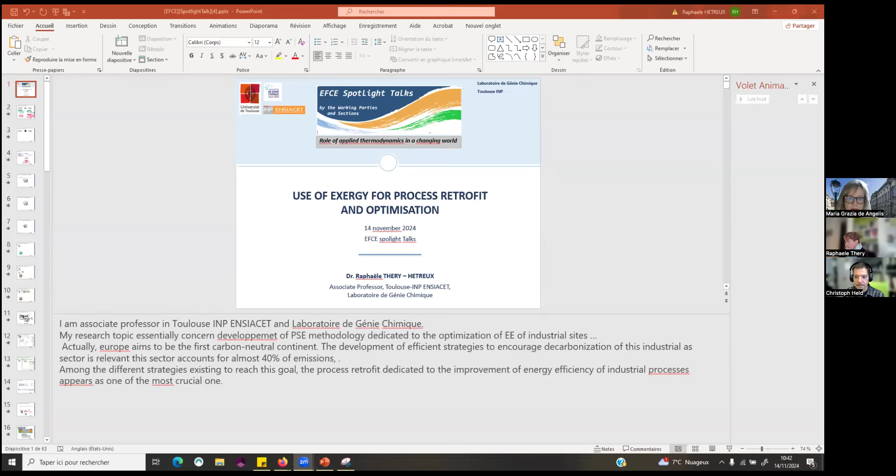That's the good one. Yes, a bit. Yes. Is it okay? Perfect. Screen? Yes, perfect. Thank you very much.

So thank you very much for your introduction. I am an associate professor in Toulouse INP-ENSIACET and in the Laboratoire de Génie Chimique in Toulouse. My research topic essentially concerns development of PSE, process system engineering methodology dedicated to the optimization of energy efficiency of industrial sites.

Europe aims to be the first carbon neutral continent, and the development of efficient strategies to encourage decarbonization of the industrial sector is relevant because this sector accounts for almost 40% of emissions. Among the different strategies existing to reach this goal, process retrofit, dedicated to the improvement of energy efficiency of industrial processes, appears as one of the most crucial ones.

In chemical engineering, pinch analysis and exergy analysis are key methods for improving industrial energy efficiency. Pinch analysis focuses on maximizing thermal energy recovery within processes, often leading to the development of efficient heat exchanger networks. The problem is that it only considers thermal energy.

Exergy analysis, on the other hand, includes thermal, mechanical, and chemical exergy energy components. It allows us to assess inefficiencies from irreversibilities, but also from environmental losses. However, exergy analysis is complex. It lacks systematic methodologies and computer tools dedicated to the proposal of practical retrofit solutions, and it still heavily relies on engineers' expertise.

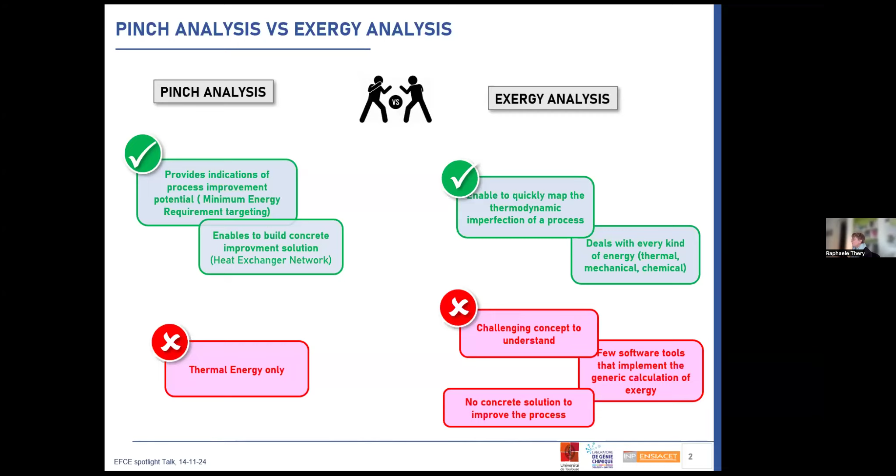So in the end, it appears that these two approaches are highly complementary and would benefit from being combined. Relying on this idea, the COOERE approach was developed through a research project funded by the French National Research Agency and involved partners such as Veolia and Prosim company and the Laboratoire de Génie Chimique and AgroParisTech.

The project goal was to create a new method that combines optimization, pinch analysis and exergy analysis to retrofit industrial processes for improved energy efficiency. The methodology was then implemented in the ProSimplus simulation software.

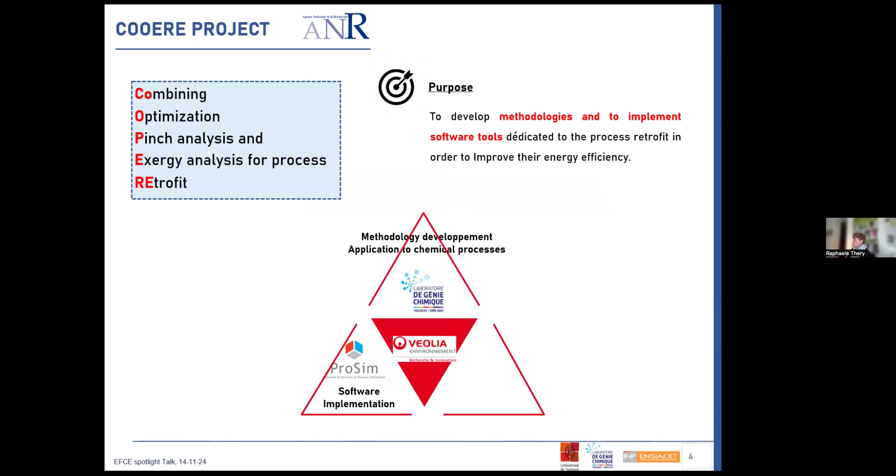Douglas suggests that you can think of a process like an onion with layers. When you're designing a new process, you work through these layers, starting from the core and moving outward. But if you're analyzing an existing process, it's usually the opposite. You start from the outer layer, like utilities and heat exchanger network, and try to keep the core intact as much as possible, only digging deeper if you really want to.

This idea is what the COOERE approach intends to implement. First of all, the COOERE approach begins with data collection, statistical analysis, and process modeling. Reliable and accurate data for the operational process are essential for effective modeling.

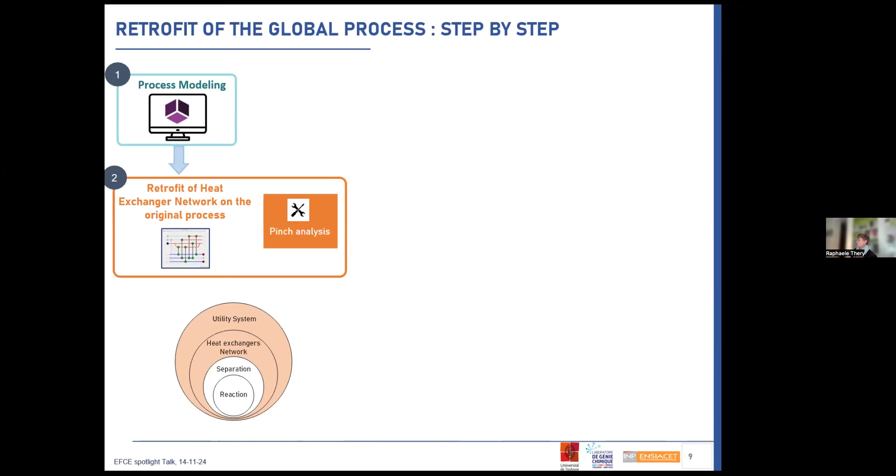The second stage will focus only on the two outer layers of the onion. The approach is essentially based on pinch analysis for the retrofit of heat exchanger network and utility system. I will not go into detail of this aspect as it's not the fundamental subject of our presentation.

If the engineer feels that the savings from the first steps aren't enough, then there's a third stage to go deeper in the process. In this stage, pinch analysis is combined with exergy analysis to get more insights. I will explain how the combination between pinch and exergy will work and show some examples later in the presentation.

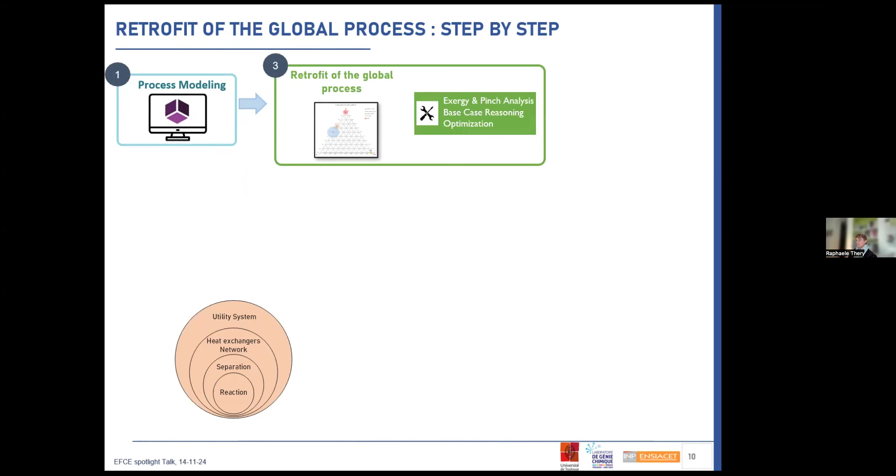Let's take an example, an academic example of an ammonia production process to illustrate the methodology. A functional analysis of this process has permitted us to identify several functional areas. These areas are modeled and mixed together in the ProSimplus software.

As we will see later, the exhaustive modeling of the process plus utilities is really necessary to perform a relevant exergy analysis. Given this model, the first step aims at performing an exergy diagnosis and then formulating some improvement suggestions based upon this analysis.

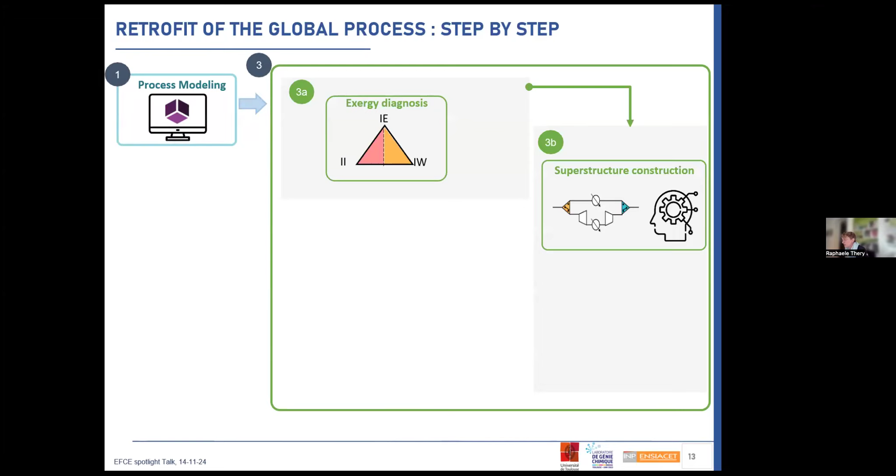So let's go to the exergy concept. Exergy originates from the early 19th century with the Carnot engine and the concept of energy quality. The term, derived from Greek, ex meaning external and ergos meaning work, was first used in the mid-20th century and is also known as available energy.

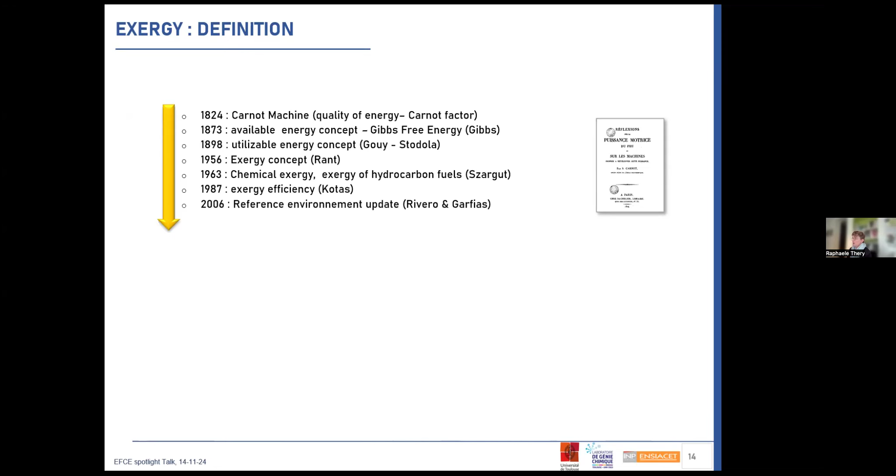Exergy represents the maximum useful work a system can produce as it reaches equilibrium with its environment through reversible processes. So it's quite complex, but we are used to saying that while enthalpy measures energy quantity, exergy will indicate some information concerning energy quality.

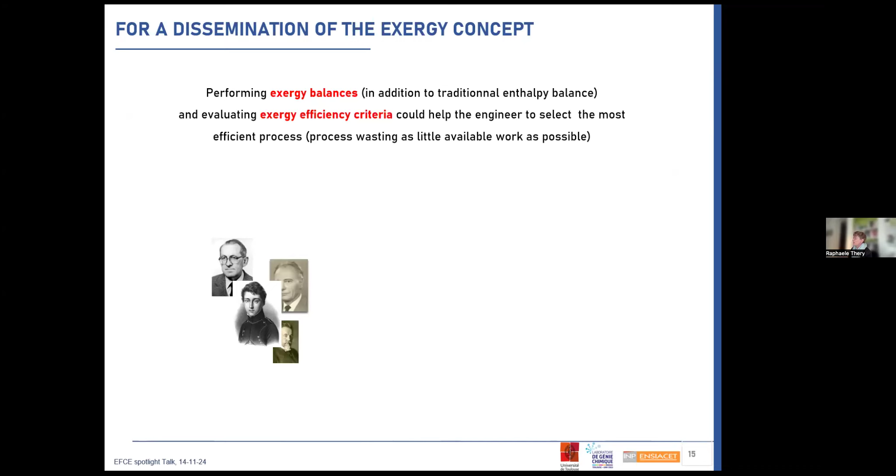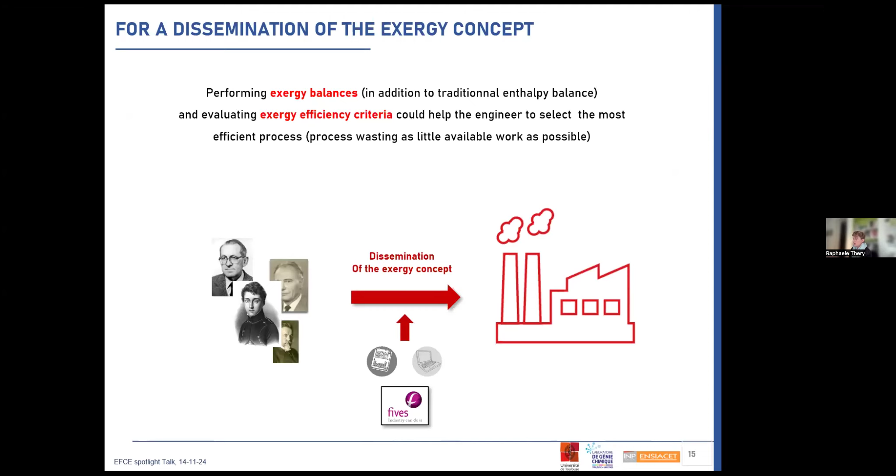Using exergy balances helps engineers choose processes that minimize wasted or destroyed available work. First, exergy was mostly seen as a complex concept suited for thermodynamic experts. Our role was to make it easier to use in order to disseminate this concept in the engineer world. So we decided to integrate it into a simulation software like ProSimplus, making it possible for engineers to perform exergy balances just as easily as for traditional enthalpy balances.

In non-ideal processes, exergy can be either wasted, meaning it is released to the environment without being recovered, such as waste heat, for example. It can also be destroyed, due to irreversibilities in the real processes.

These irreversibilities arise from factors like non-isothermal mixing, non-isobaric mixers, thermal losses, pressure drops in the unit operation. And we must also say that some irreversibilities, such as heat transfer with non-null temperature difference in heat exchangers, and chemical conversion in chemical reactors, are unavoidable because they are essential to make the process economically viable.

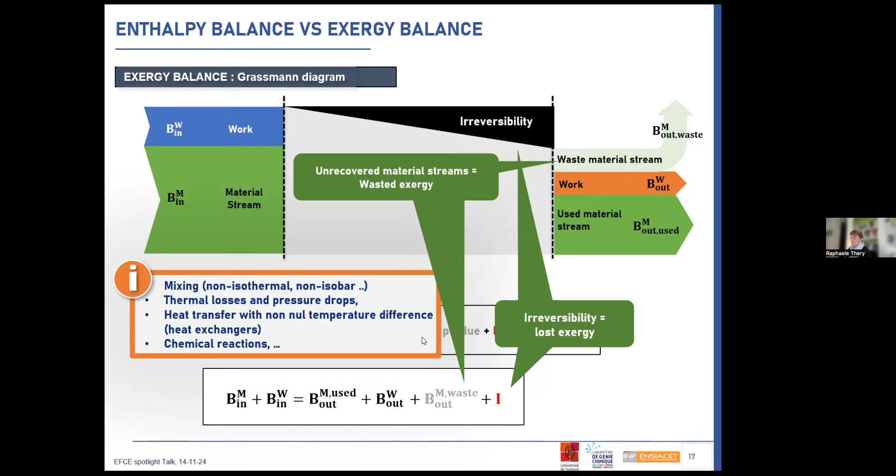In this equation, we can find the different terms. The first term is BW, which is the exergy of mechanical work. The mechanical exergy is one of the most qualitative forms of energy. So here BW is equal to W.

Excluding the irreversibility terms, which is deduced from the other ones, we can also find the exergy of material streams here. We make the difference between the used material stream and the waste material stream, which is unrecovered.

Assuming that kinetic and potential contribution to exergy remain constant in chemical processes, the remaining contributions that must be evaluated in the simulators are physical and chemical ones.

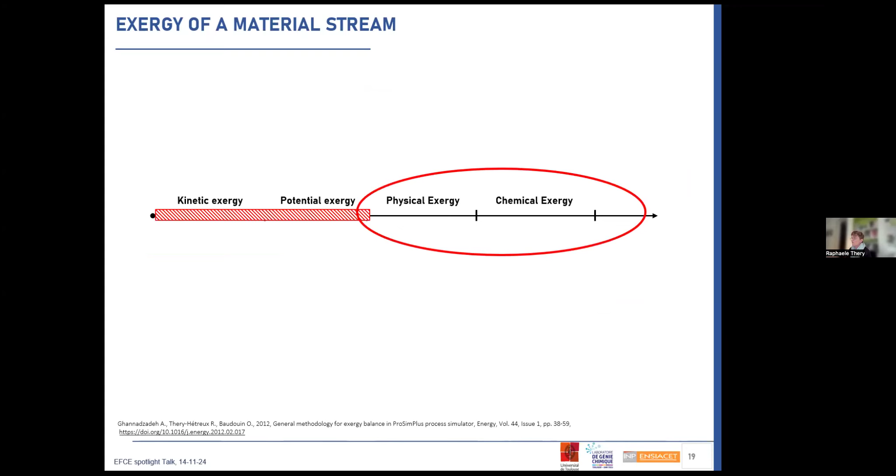So to evaluate this term, a general formulation for the exergy had to be implemented in ProSimplus. The formulation to be implemented in a generic software must be applicable across different thermodynamic models and also valid for liquid vapor streams.

As you can see on this diagram, exergy can be composed of 3 different contributions. The first one is the thermal contribution of exergy, which is the minimal work for the streams to go from the process temperature to the environmental temperature.

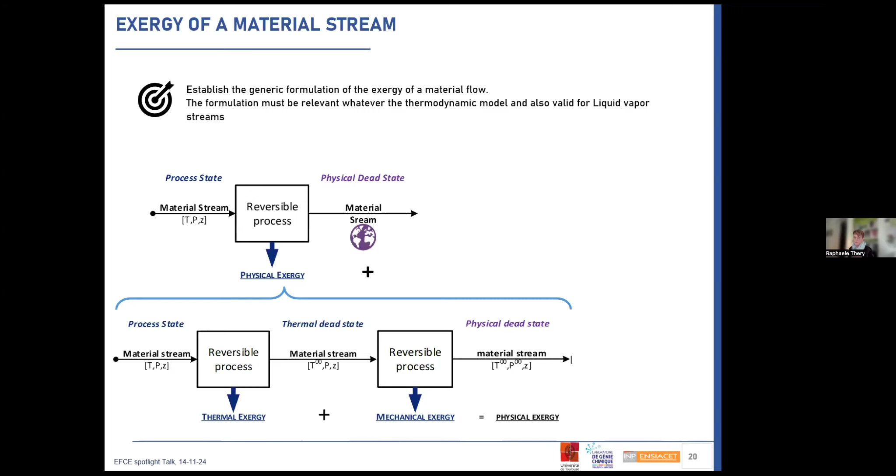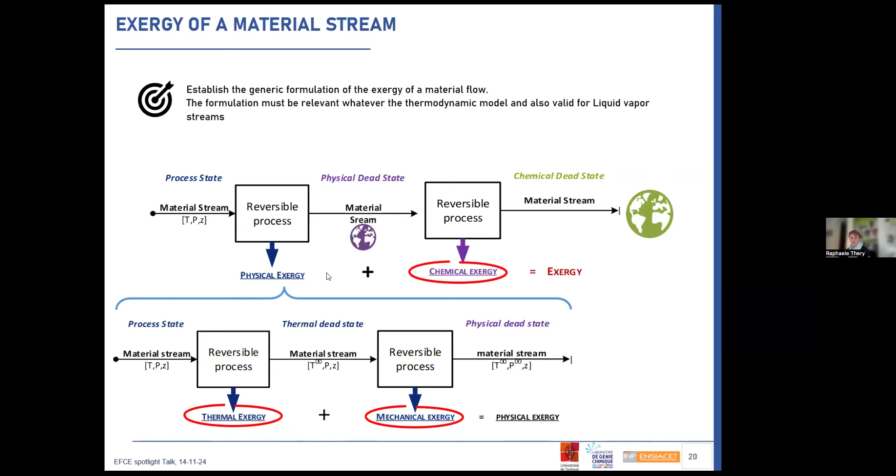The mechanical exergy, which is just the minimal work required to go from the process pressure to the environmental pressure. And finally, the chemical exergy, which is related to the minimal work required to go from the process composition to an equilibrium mixture made up of environmental components. This is the so-called chemical dead state. So this calculation has been implemented.

As you can see on this diagram, no heat stream appears. Why? Because these hot and cold utility streams must be represented as material flows in the modeling simulation. As a consequence, a relevant exergy optimization of the process under study necessarily requires building a complete model, including the core process, but also the utilities.

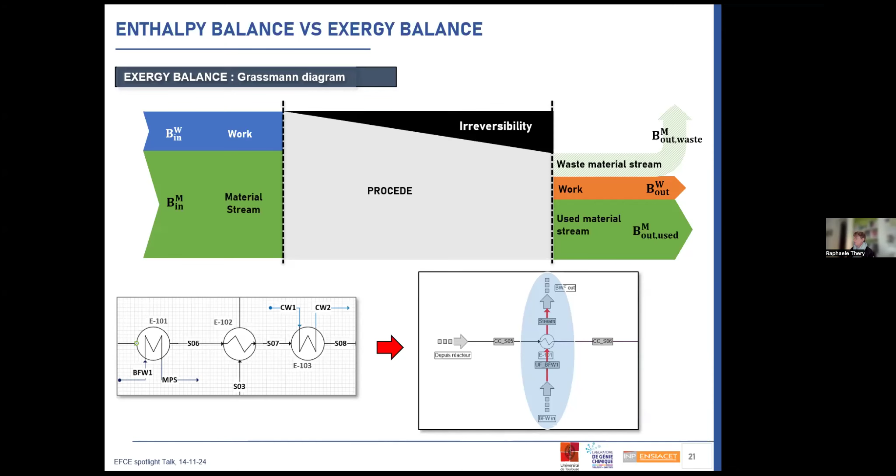So, what's the goal of exergy balances? Basically, it helps us pinpoint which part of the process should be improved in priority. To get a meaningful exergy map for the process, it is useful to look at KPIs such as exergy efficiency.

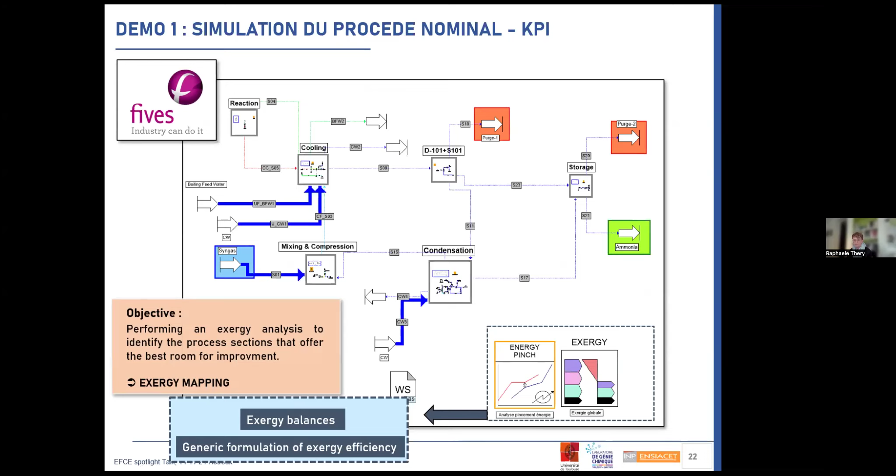Within the exergy module implemented in ProSimplus, we can set up an exergy balance and establish a very efficient formulation of exergy efficiency. So let me explain this formulation.

In any unit operation or process zone, a large part of exergy passes through the system without being modified. For example, in a heat exchanger, the heat exchanger will only affect the thermal part of the exergy. The chemical and mechanical part of exergy will not be modified. So in a heat exchanger, the transiting exergy will be composed of the mechanical and chemical contributions.

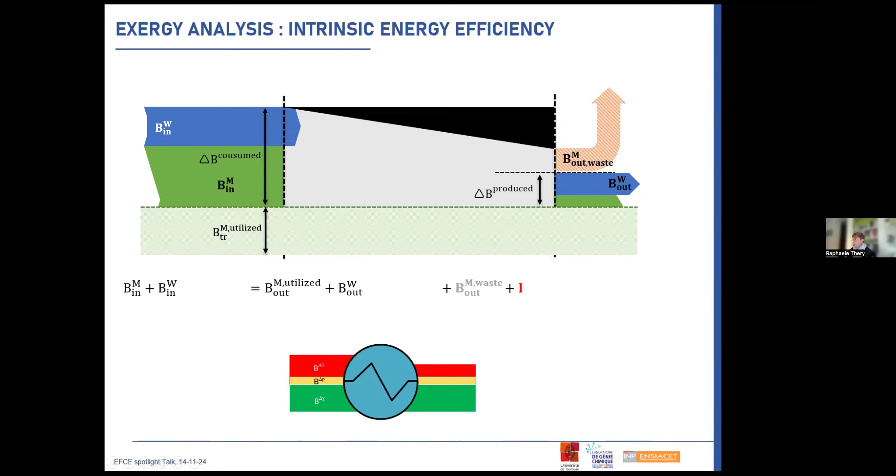By adjusting the exergy balances, deducing the transiting exergy on both sides of the equation, we can define 2 key concepts: the consumed exergy and the produced exergy. This approach helps us create a much more efficient formulation of exergy efficiency, which will be implemented in the ProSimplus simulation.

Unlike other formulations, such as rational efficiencies, intrinsic efficiency works really well for systematic evaluation in a simulator.

Another interesting point is that when we divide each part of the exergy balance by the consumed exergy, we can connect the three KPI coefficients that help us analyze the system. We can show that the sum of intrinsic efficiency, intrinsic losses, and intrinsic irreversibilities adds up to 1, so that we can use a ternary diagram to plot each area in the process visually.

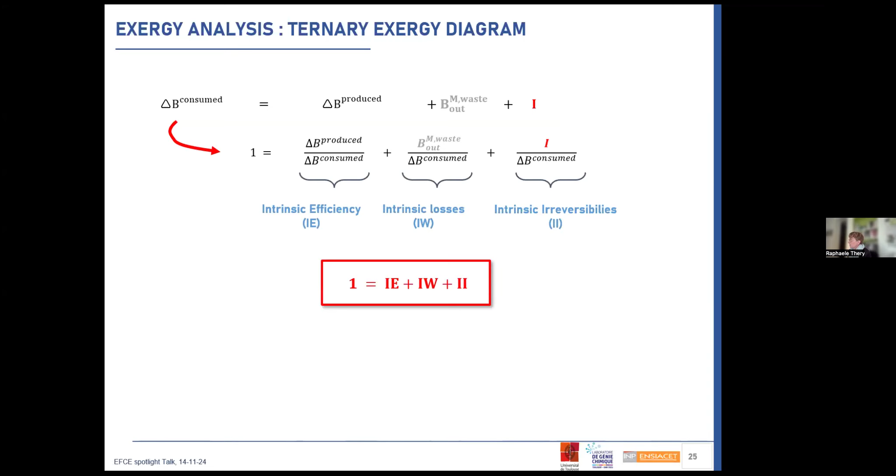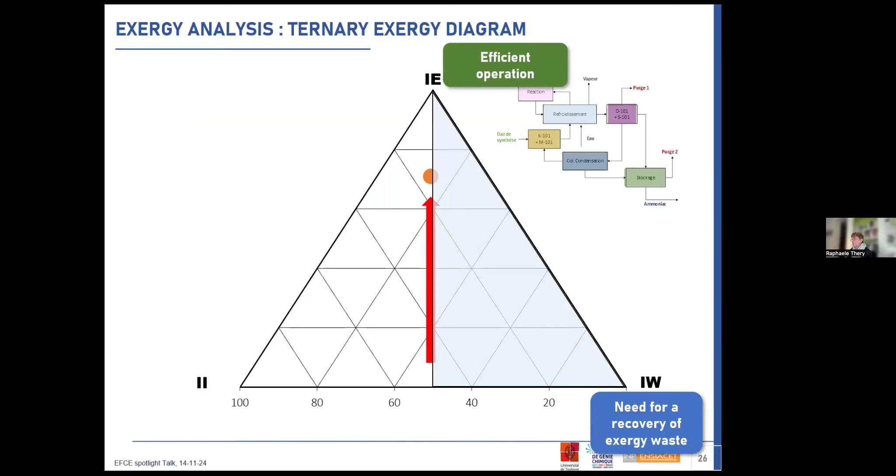The more the point is at the top of this diagram, the more efficient the zone is. An inefficient point located on the right side of the diagram indicates a need for better recovery of exergy waste, whereas a point located on the left side indicates a section that suffers from irreversibilities. Finally, the size of the point is proportional to the amount of destroyed or wasted exergy.

So coming back to our illustrative example, you can find all the points concerning the different sections of the process here, with different colors for each section. For example, it seems obvious that the mixing and compression section needs to be improved toward reduction of irreversibilities, whereas the separation and purge section will be improved in terms of recovery of external wastes.

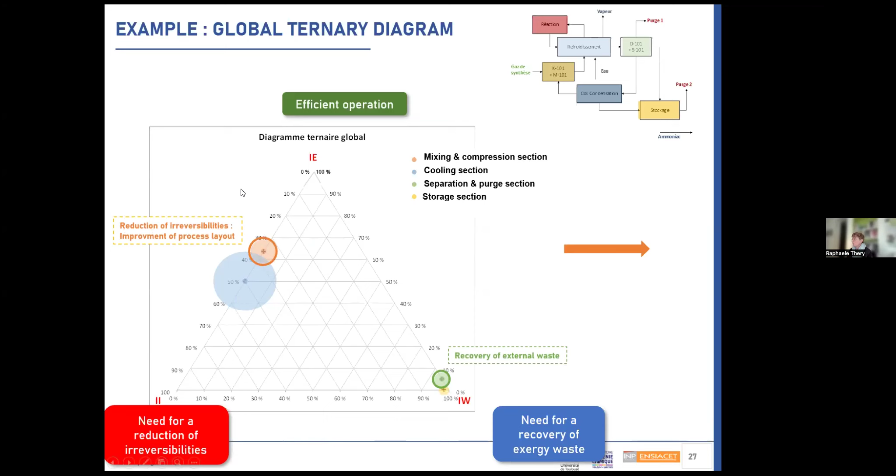So let's begin studying the mixing and compression section. This diagram illustrates the intrinsic irreversibility and the relative irreversibility of each unit operation of the section. As you can see, the mixer contributes to more than half of the irreversibility of the section, and the total intrinsic irreversibility is almost equal to 100%.

So this irreversibility is mainly due to the non-isothermal mixing in the mixer. The remaining irreversibility here is due to a high pressure drop in the compressor.

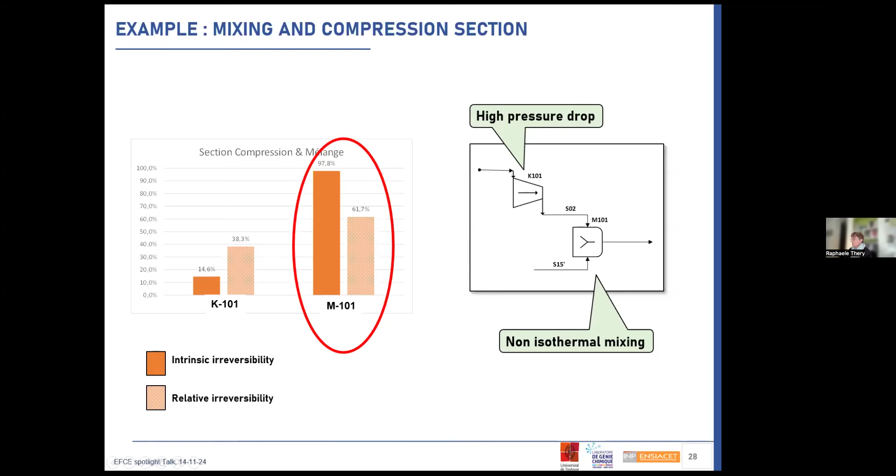Let's look at a few changes that we could introduce in the structure to reduce the irreversibilities. First off, we could imagine adding a heat exchanger to each inlet of the mixer. This would help achieve isothermal mixing and reduce exergy losses there. For the compression section, we could imagine adding an extra stage of compression with a heat exchanger between the two stages.

One thing we must keep in mind is that at this stage of the method, we do not include any heat integration, and we model only the hot and cold requirements necessary to perform these structures. So in terms of optimization variables, the unknown variables that must be optimized are the temperature and pressure in the compression stage, and the outlet temperature in the mixer. We also have constraint variables, and variables which will be deduced from simulation through mass and enthalpy balances.

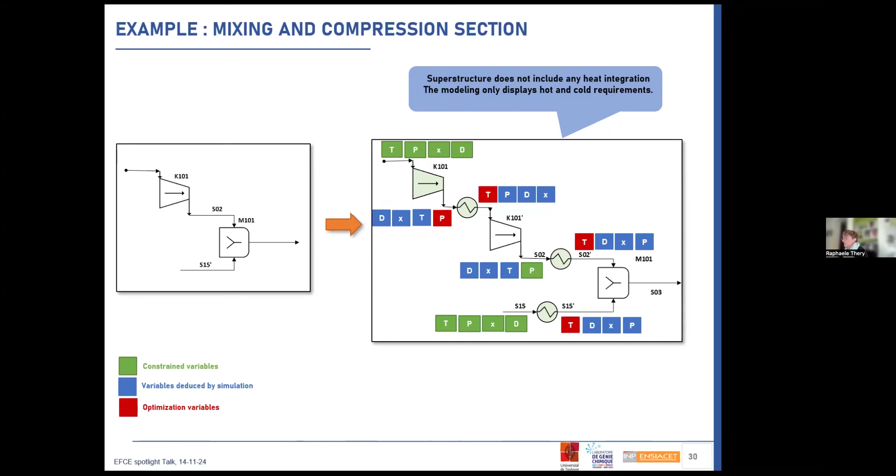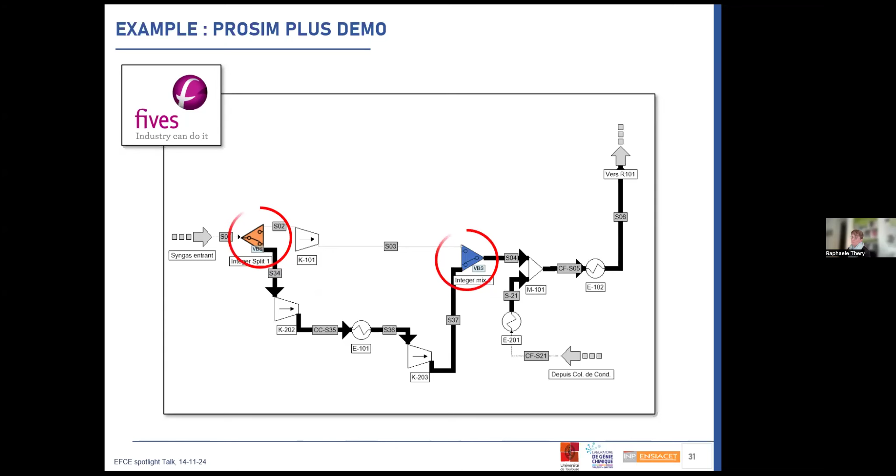Let's consider now the separation section, which should improve the output stream recovery. According to ProSim Plus, we can find that the exergy losses are mainly due to chemical exergy. If we look at the composition of the stream here, it's mainly composed of hydrogen, methane, and ammonia. So we could imagine implementing complex costly separation sequences, but at this stage we will better address the mechanical, thermodynamic, and thermal exergy loss.

Most of the loss is mechanical exergy, and to a lesser extent, thermal exergy here.

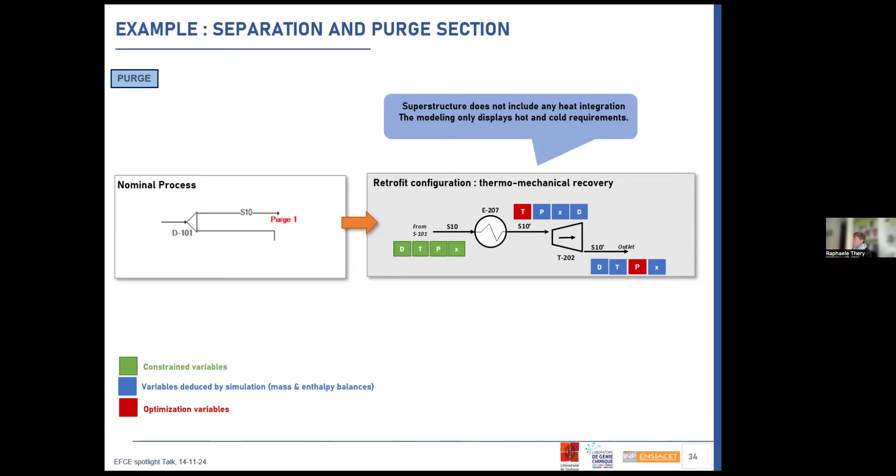So then we could imagine structures which would implement a thermomechanical recovery by introducing heat exchangers with output temperature as a variable and turbines with output pressure as a variable. Again, this structure does not include any heat integration. The modeling only displays the hot and cold requirement at this stage.

Here again, you can find the switch modules that help decide between thermomechanical recovery or no mechanical recovery.

Given these superstructures, the next steps will consist in performing a multi-criteria optimization in order to decide which structure should be the best. We must know that exergetic analysis is the most powerful tool to propose and help pinpoint the inefficiencies to construct the superstructures. However, to be adopted by engineers, the approach should, in the end, propose processes that combine energy efficiency and economic viability.

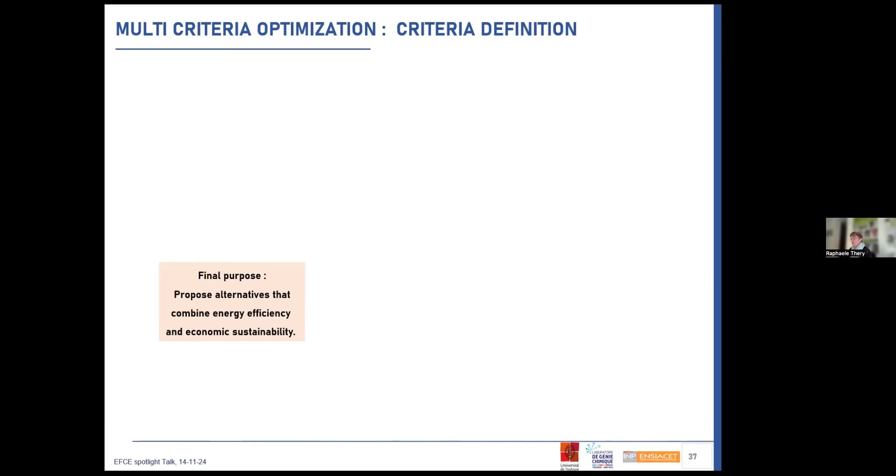Coming back to the mixer example, which is a very good example, if we add two upstream heat exchangers to the mixer, we would reduce the irreversibility to zero. That's okay, but this comes with a trade-off because it will increase the hot and cold utility requirements. So we should add extra heat exchangers only if they lead to the definition of integrable hot and cold streams that will contribute to better internal heat recovery.

So this is where we see the value of combining pinch and exergy analysis, because exergy analysis acts as a diagnosis tool to identify areas for improvement or to define the structural modification, while pinch analysis will provide a concrete evaluation criterion to fine-tune the operating parameters of the process.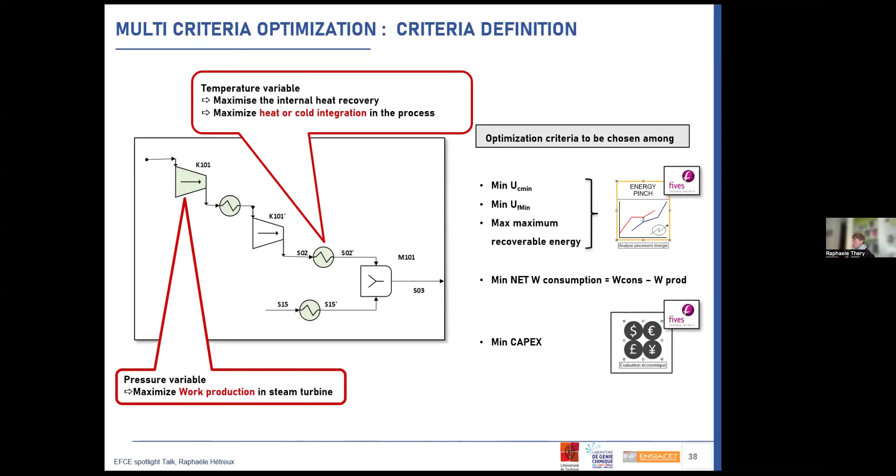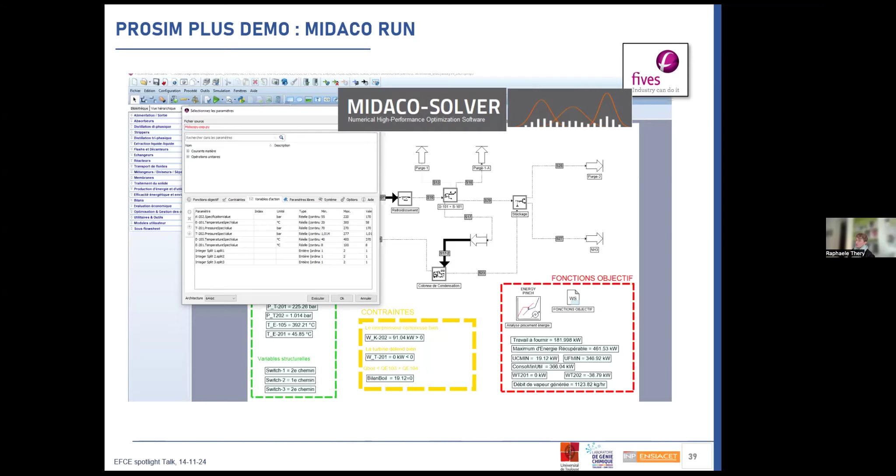For this purpose, the ProSim software can be combined with a MIDACO module for multi-criteria optimization. It is based on an ant colony meta-heuristic approach. As you can see here, you have different windows that enable you to construct the optimization model in ProSim by defining the variables, the objective function, and so on.

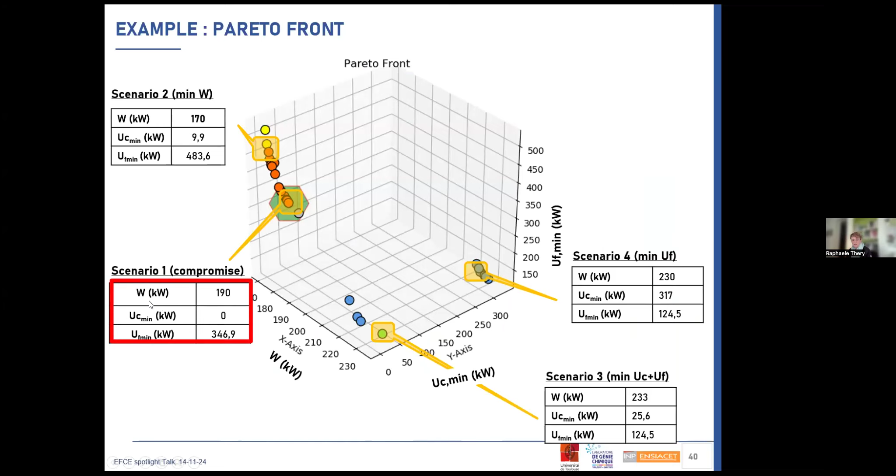So if we run this, we have defined 3 optimization criteria: energy consumption, minimum cold utilities, and minimum hot utilities. And we obtain a Pareto front, which allows us to obtain different solutions that will minimize each of these criteria. So just to finish this presentation, I will illustrate the result obtained for the scenario which guarantees a compromise between all these criteria.

So here you have the result of the superstructure, and you find in green the new unit operations that should be introduced. You can notice a gas turbine layout at the output of the reactor, thermomechanical recovery, two-stage compressors. As you can see on the result, comparing the nominal process and the optimized process, there is a significant improvement of the recoverable energy here.

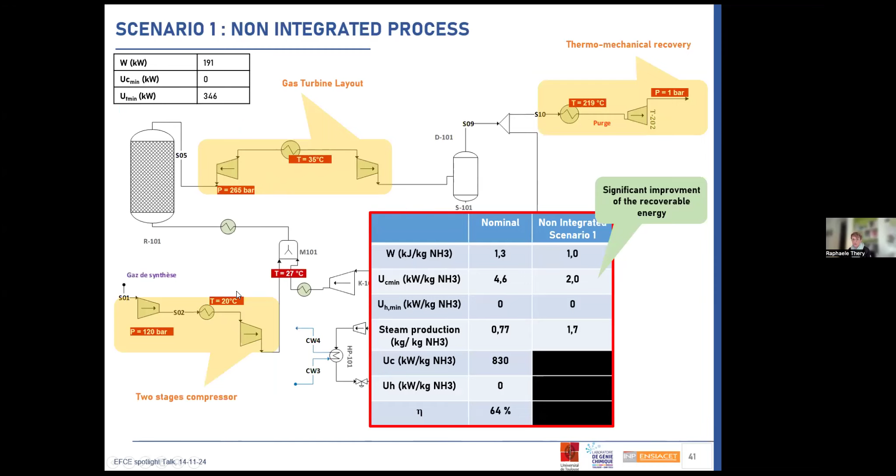So we must know that in this sequence, we have no integrated solution, just requirements. So the last step must be the definition of the heat exchanger network.

So for that, we use a reflex software that we developed in the Laboratoire de Génie Chimique, and we try to put on this structure the heat exchanger network. And finally, we obtain this kind of integrated process with 4 integration heat exchangers in green here.

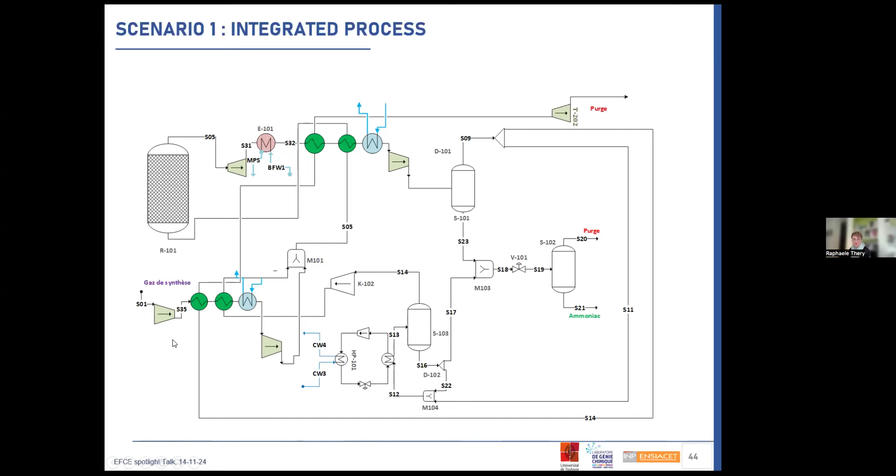And when we look at the results, we see that we have a significant improvement of performance concerning the cold utility consumption, the mechanical work consumption. You can also produce much more steam recovery in this heat exchanger, more than twice. And it's really interesting, and also you can see that the exergy efficiency is better than in the former one.

So to conclude, we developed a new approach focused on retrofitting industrial sites by smartly combining pinch analysis with exergy analysis. Traditionally, this method was used for retrofitting existing processes, but actually it is also used for the optimization and conception, grassroots design of processes dedicated to the production of e-fuels.

And the problem is that we must admit that the construction of the superstructure here relies heavily on the engineer's expertise. And to fill this gap, we're currently working with one of my PhD students on the development of a new framework dedicated to the automatic construction of the superstructure, using ontology paired with rule-based reasoning.

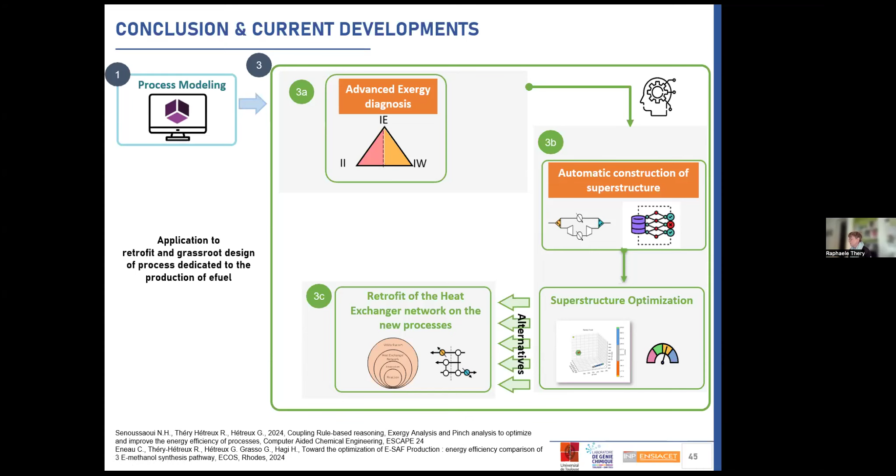So here are the contributors of all these works. I would like to thank them, and I'm ready for some of your questions, if you want.

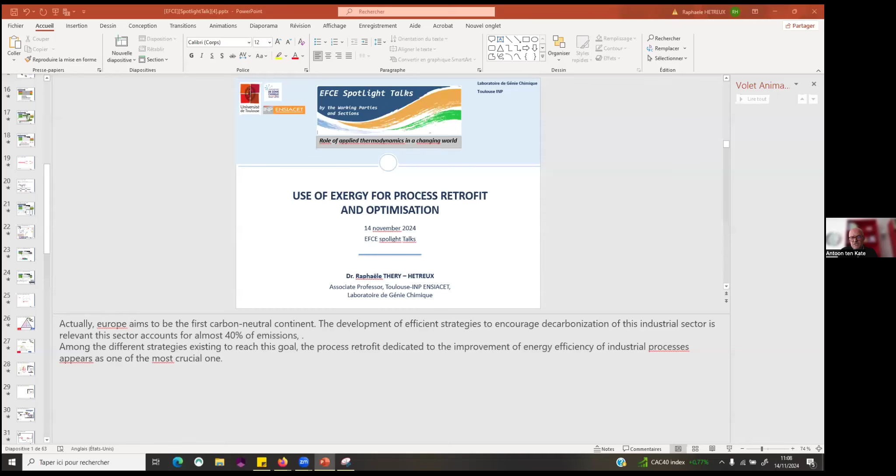Thank you, Raphaelle, for your excellent presentation. It shows a very nice way to introduce exergy analysis to really analyze how sustainable your processes are. Of course, it remains a challenge, I think, because exergy indeed is a difficult topic to grasp.

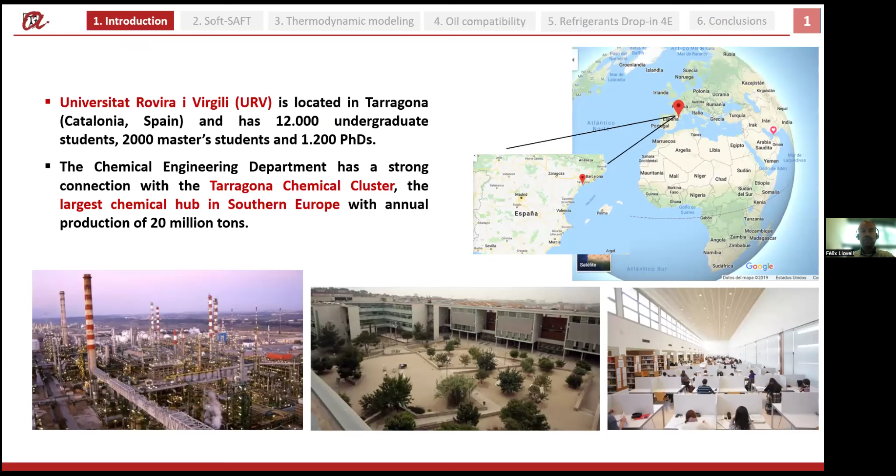So as I was introduced, I come from Universitat Rovira i Virgili, which is located in Tarragona, south of Barcelona, in the area of Catalonia in Spain. The chemical engineering department has a strong connection with the Tarragona chemical cluster, because we currently have one of the largest chemical hubs in Europe, indeed the largest one in Southern Europe. So basically, there is a lot of interest in developing sustainable processes to make our chemical processes affordable. I think I don't need to convince you about this, but I will just quickly move on to the scientific evidence on the planet's average surface temperature increasing and going into an exponential rise, particularly in the last 25 years.

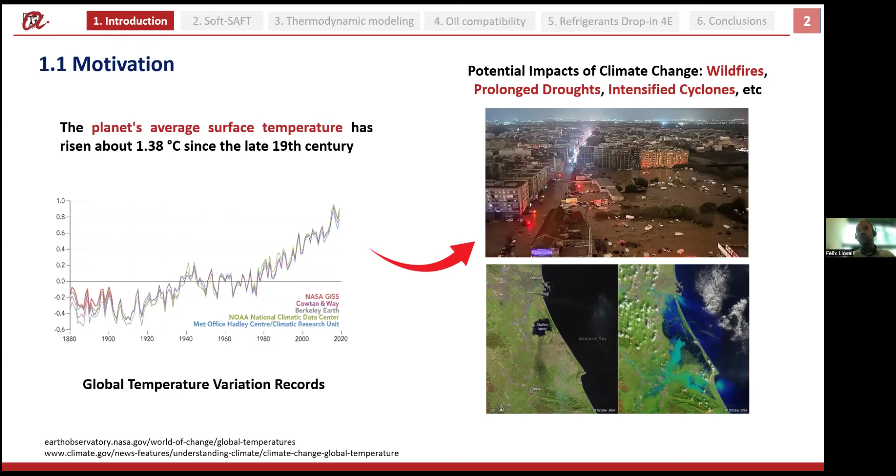Of course, there is a lot behind this, but the point is that there is more and more evidence moving in the same direction. We need to take action on climate policy. And although CO2 is always seen as the main culprit, there are other greenhouse gases that have an important effect. One of them is hydrofluorocarbons.

Hydrofluorocarbons are synthetic greenhouse gases commonly used in refrigeration processes. Although they are classified within the F-gas section and account for only 3% of total emissions, their global warming potential is up to 10,000 times greater than CO2, depending on the gas used. Their atmospheric lifetime is up to 50,000 years.

According to many statistics and studies, they can be responsible for up to 45% of climate change by 2050 if no action is taken, which means a 0.5 Kelvin increase due to the action of these gases.

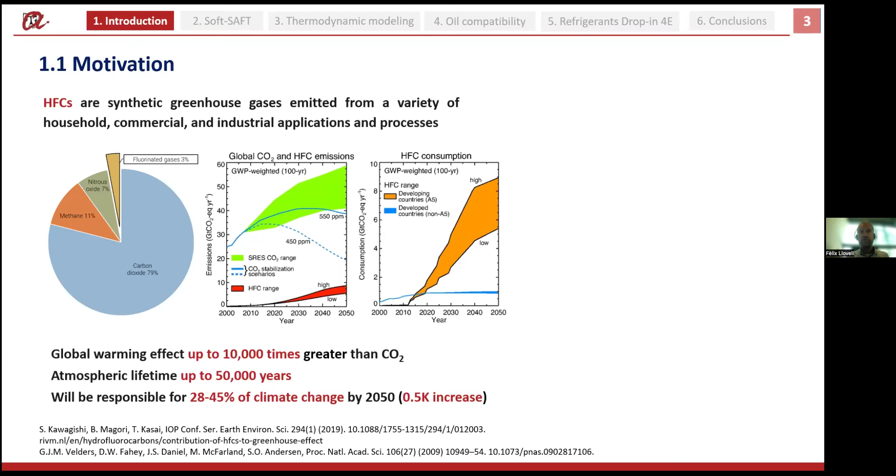There has been development in recent years of many CO2 equivalent emission avoidance strategies, and these also include the restriction and decrease of the use of hydrofluorocarbons, particularly in refrigeration processes and also in organic Rankine cycles.

We already have a previous success story concerning the Montreal Protocol, which phased out chlorofluorocarbons to avoid the hole in the ozone layer. At that point, it was relatively easy to move from chlorofluorocarbons to hydrofluorocarbons because there was no loss in efficiency in the processes.

But now the increase in CO2 equivalent emissions causing global warming has provoked the Kigali Amendment, which aims to phase down hydrofluorocarbons by 80% by 2047. This is an agreement that has been ratified by almost all countries in the world and poses several challenges, particularly for the refrigeration industry.

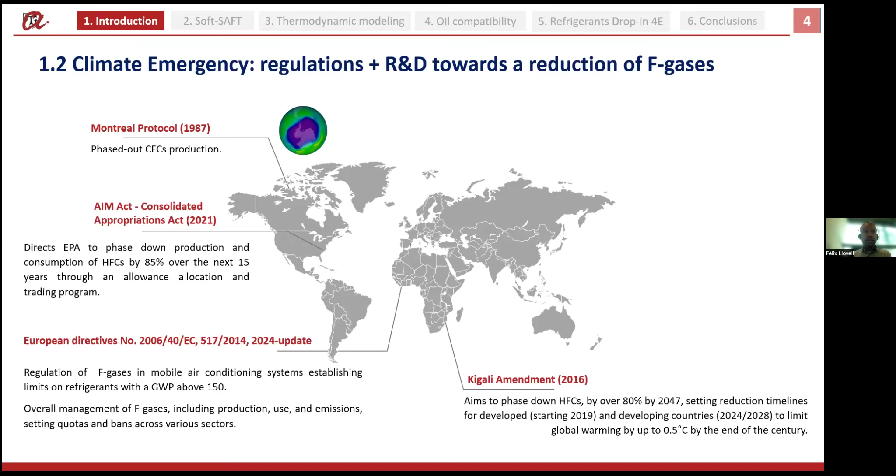The European directives are even stricter in some cases, imposing regulation on mobile air conditioning systems, establishing limits of global warming potential above 150. The latest update also implies overall management of F-gases and a steeper quota in terms of restrictions. The American AIM Act in the United States has also directed a phase down of production and consumption of hydrofluorocarbons.

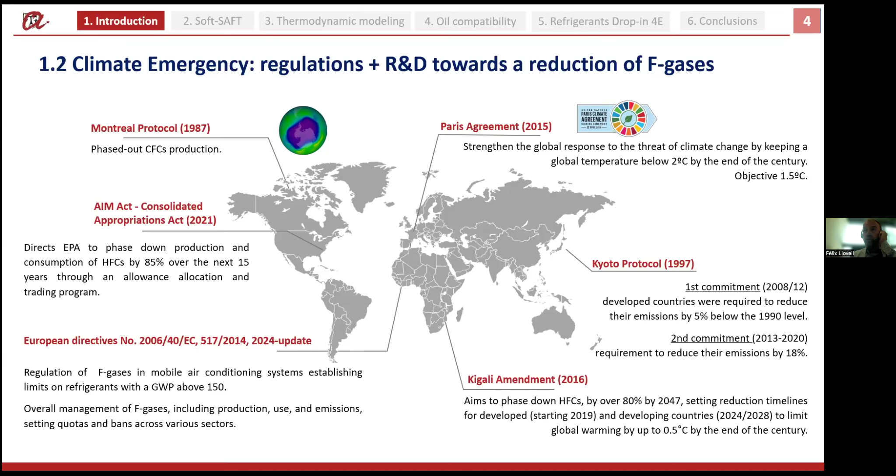What I am trying to highlight here is that there are several rules that complement the Paris Agreement and the already somewhat old Kyoto Protocol in order to reduce greenhouse gas emissions.

As I said, the population covered by the Kigali Amendment reaches almost 85%, and it is important to consider that it is very necessary to reach this agreement in order to decrease emissions to something that can be reachable and achievable for the world.

There has been a big evolution in refrigerants since the very beginning. At first, when refrigeration was born after the Industrial Revolution, whatever worked was used; this was the first generation of refrigerants, and toxic and flammable compounds were used. Some time later, in the 1930s, safety and durability were sought, and chlorofluorocarbons and hydrochlorofluorocarbons were born. They were very good refrigerants that worked efficiently and safely.

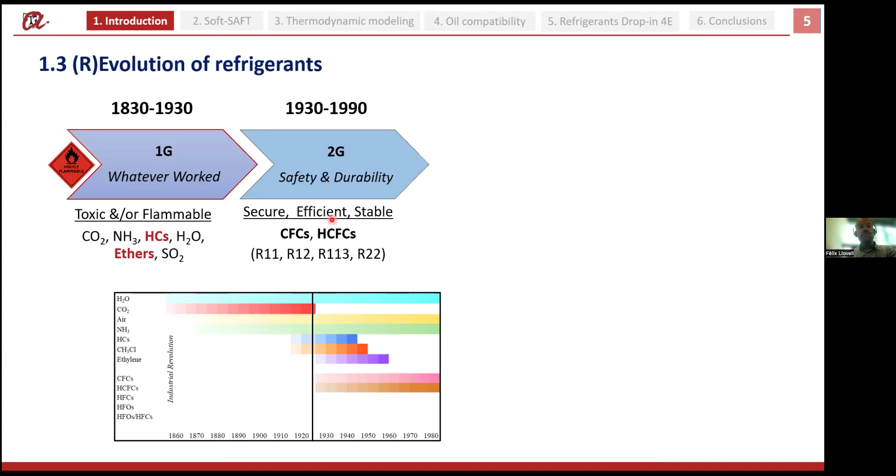But with time, it was discovered that they were also causing an impact on the ozone layer. That's why, in order to protect the ozone layer, non-ODP refrigerants appeared, and hydrofluorocarbons became the leaders until now, where we have to look for new solutions.

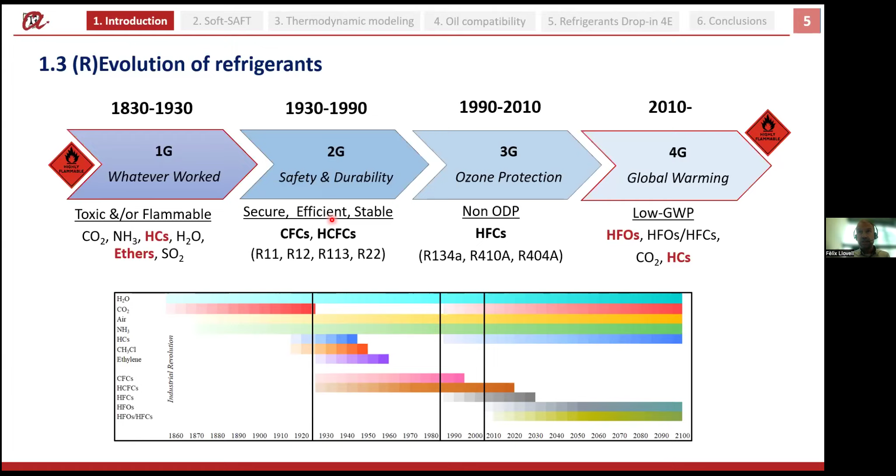These new solutions go through the use of low global warming potential systems, including hydrofluoroolefins, the same CO2 that was at some time forgotten, and also the use of hydrocarbons, always looking for a combination that is safe enough, considering aspects such as technical performance, safety, and flammability.

So the fundamental aim of the work I would like to present is to show how thermodynamics can help in this process, how it can help to rationally design fourth generation drop-in refrigerants to be used in air conditioning applications.

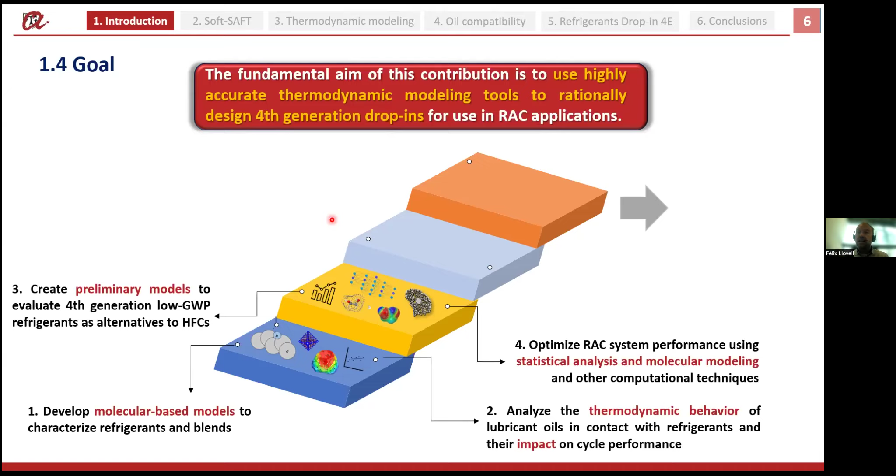For this purpose, we want to go from molecular-based models, from basic thermodynamics, to analyze the thermodynamic behavior of the compatibility of lubricant oils in refrigerants, check how these models can be used to study and understand low global warming potential refrigerants that can be used as alternatives, and optimize air conditioning cycles using these tools and other computational techniques.

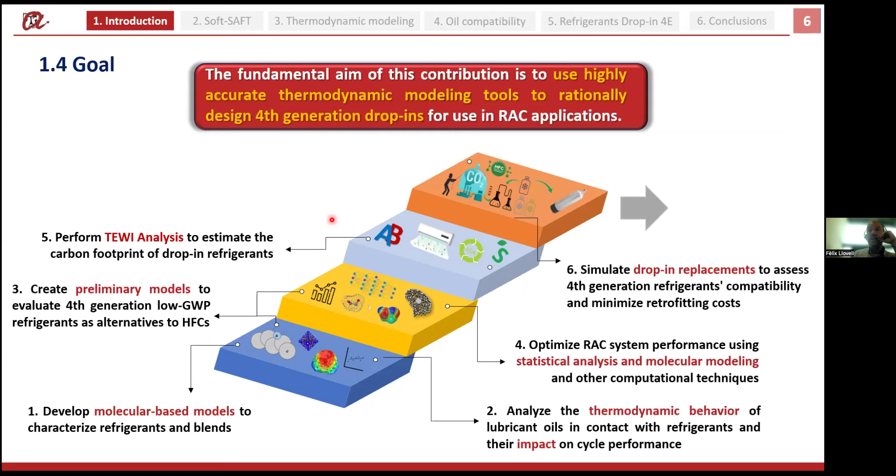We also aim to analyze the environmental impact of these new mixtures, estimating the carbon footprint, simulate these drop-in replacements to assess fourth generation compatibility in order to minimize retrofitting costs, and finally implement the 4E analysis—energy, exergy, environmental and economic—to assess cooling technologies, meeting the United Nations Sustainable Development Goals.

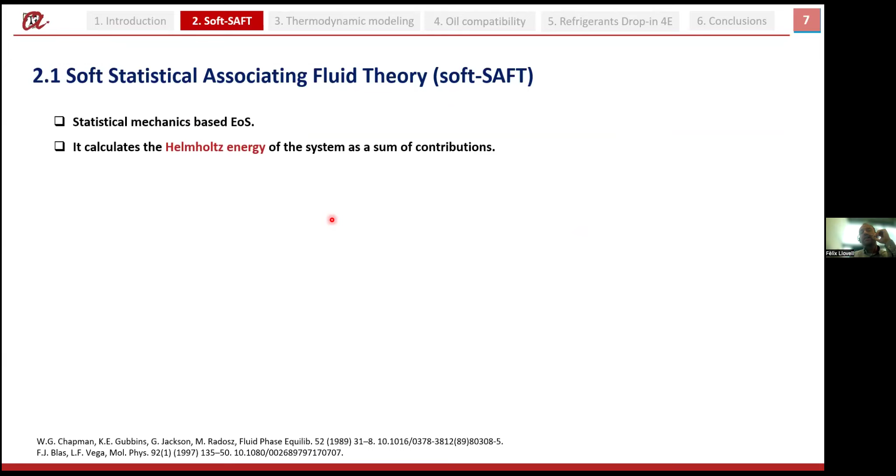The tool used here is the soft-SAFT equation of state, which is a variant of the classical SAFT. This is a molecular-based equation of state that uses the Helmholtz energy to estimate the total energy of the system as a sum of contributions coming from a series of physical effects.

The equation, as I said, comes from the contribution of Chapman and Gubbins, and this is the variant developed by Felipe Blas and Lourdes Vega.

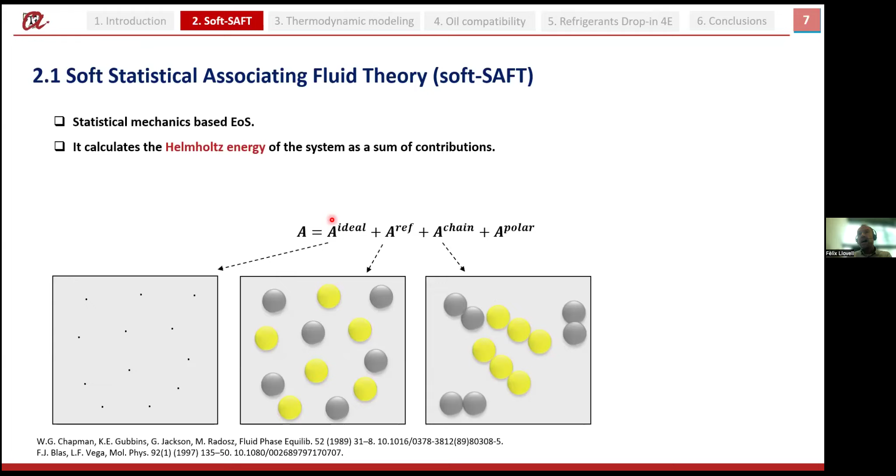As many other SAFT equations, it splits the Helmholtz energy into several contributions. We have an ideal contribution, a reference term that uses a Lennard-Jones intermolecular potential, and a chain term that includes the contribution due to the covalent bond formed between the different monomers forming chains. There is also the hydrogen bonding term, the association term.

That association term is not included here in this case, because we are instead going to explicitly consider a specific term for polarity, which is one of the most important contributions in refrigerants.

So basically, the famous association term of SAFT is not included in the molecules we are going to study. A refrigerant, a hydrofluorocarbon or hydrofluoroolefin, will be described as a sum of monomers that have a particular dipole moment. We have three molecular parameters called the chain length, the segment diameter, and the dispersive energy between the segments that characterize these monomers.

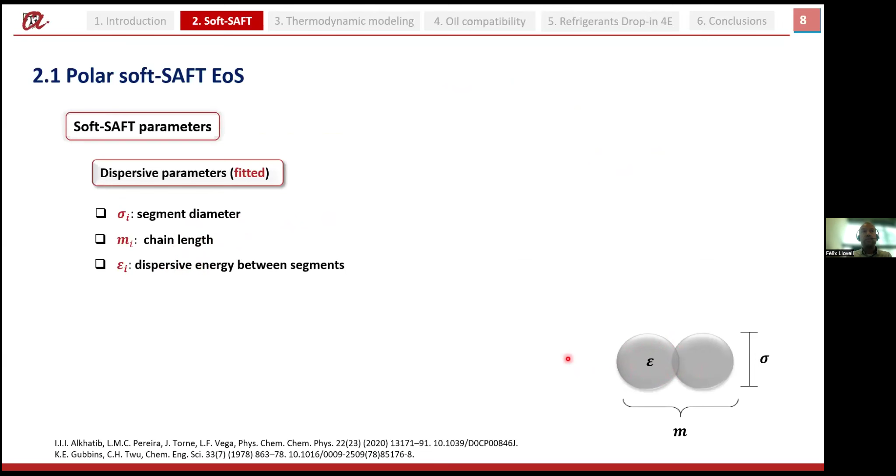Apart from that, we have two additional parameters coming from the polarity: the dipole or quadrupole moment, which is fixed according to available experimental data at vacuum conditions, and the fraction of polar segments, which is estimated according to an approximate calculation of how much of the molecule is affected by the polarity.

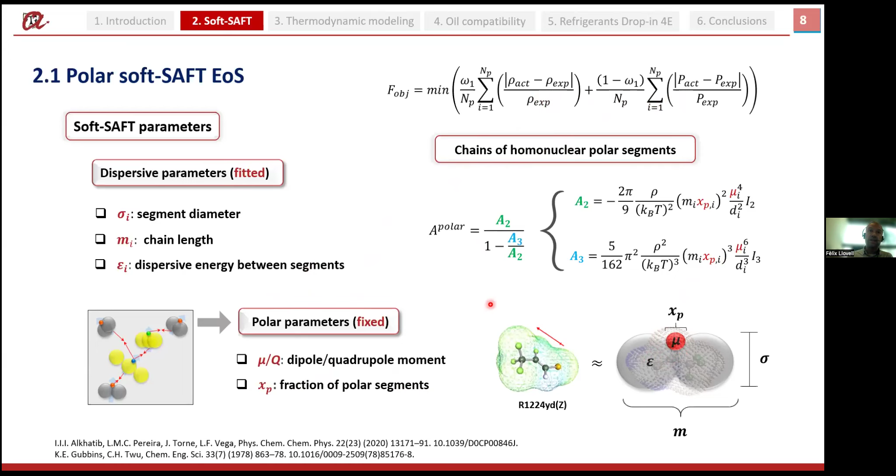There is a classical optimization using the saturated liquid density data and vapor pressure in order to describe the vapor-liquid equilibria of the system. At the end, we have a total of 5 parameters—I would say 4, because the dipole moment is taken from experimental data, and the fraction of polar segments is kept within a reasonable range.

When we deal with mixtures and multi-component systems, we need to correct deviations due to the asymmetry of the compounds with different size and energetic interactions. There are two binary parameters, one related to size and one related to energy. In this work, only the energy one will be used, with the exception of some particular mixtures with lubricants, so in most cases there will be only one of them. This parameter is used with the classical Lorentz-Berthelot combining rules.

And finally, the van der Waals one-fluid theory is used to calculate the Lennard-Jones term.

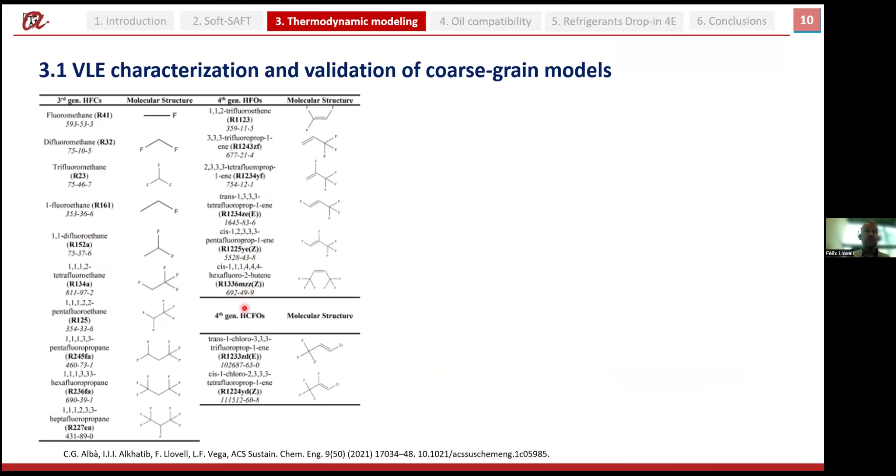So first of all, in order to understand how we are going to apply this to an air conditioning system, we need a very correct and accurate characterization of refrigerants. For this purpose, a total of 18 common refrigerants, considering 3rd generation hydrofluorocarbons and 4th generation hydrofluoroolefins, are used and characterized in this work, in the manner explained before.

The dipole moment is specified experimentally, and the fraction is estimated considering the amount of fluorinated atoms in the system and how they affect the polarity. These calculations can be done using different programs that estimate the charge distribution, such as Cosmo RS or Avogadro. Once this is done, the rest of the parameters are fitted.

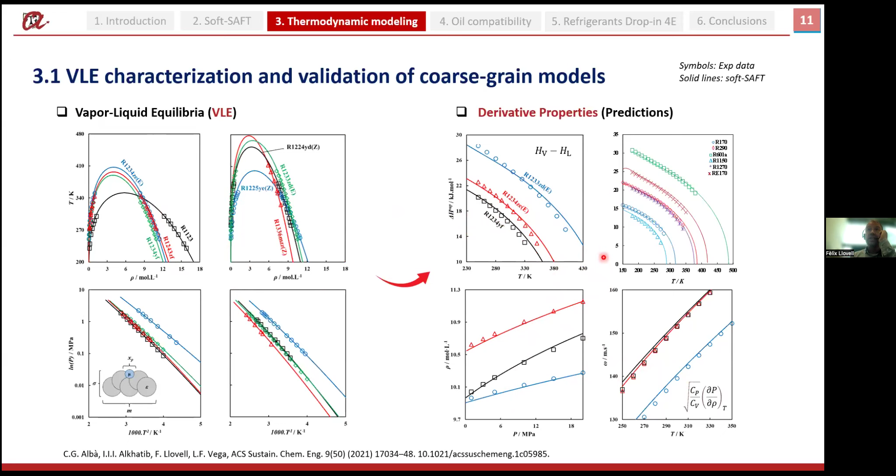In this case, there are two properties that are particularly important: the enthalpy and the entropy, because these properties are crucial in order to study our air conditioning cycle.

The enthalpy and the entropy are also predicted and compared to experimental data—lines are always the model and symbols are the data. We can see there is a very good description in all cases.

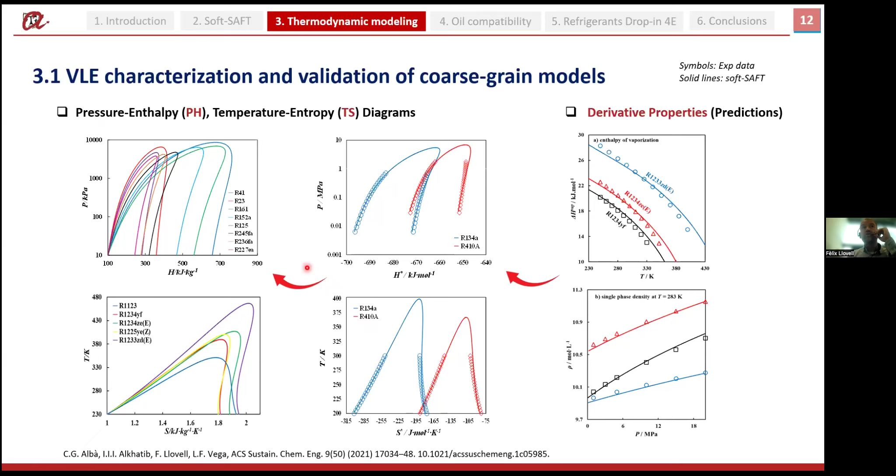That allows us to develop the pressure-enthalpy and temperature-entropy diagrams of all fluids, also including mixtures, such as R-410A, which is a mixture of two different hydrofluorocarbons.

Once we are confident, we deal with the different mixtures, and here we study not only mixtures between hydrofluorocarbons, but also hydrofluorocarbons and alkanes and other possible compounds that can be included as alternatives. All these mixtures are predictions. When we have a 1 here, it means there is no fitting, no binary parameters. We can see that several F-based binary mixtures can also be predicted in very good agreement.

Concerning the characterization of fluorinated compounds, between hydrofluorocarbons and hydrofluoroolefins, or hydrofluorocarbons and hydrofluorocarbons, we have studied at least 50, 60, 70 different binary mixtures, and in all cases it is possible to describe the vapor-liquid equilibria, either using a prediction, which means Xi equal to 1, or using a value very, very close to 1. In all cases the description of the system is very accurate, and only in very few cases do we have a binary parameter that deviates from the predicted value.

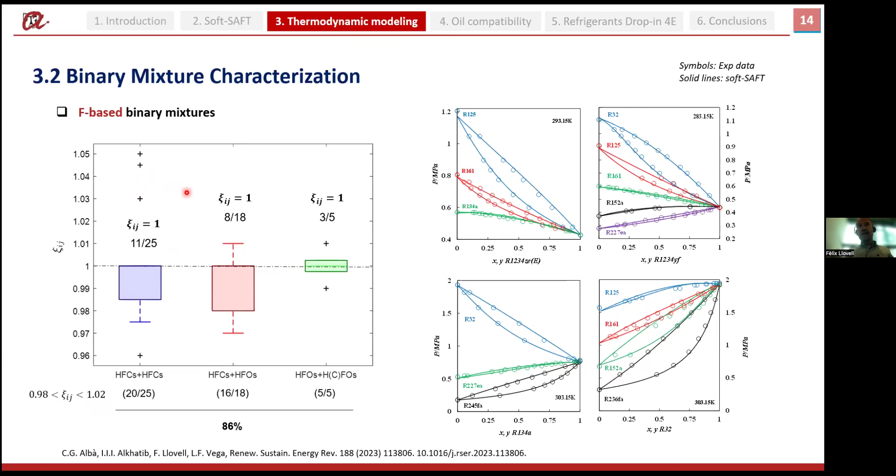All this is done in order to be sure that the results I will show now are accurate. So I would like to highlight two cases. The first one is the lubricant compatibility on refrigerants.

The lubricant characterization is a very crucial aspect for refrigerants because, although it is not desirable, there are always leaks in the compressor, and there is always contamination of the refrigerant due to the presence of oils. So it is very important to understand when this is going to affect too much the performance of the system, in order to know when it is necessary to change and clean the system.

So in that case we are using thermodynamics. We are studying two families of esters: pentaerythritol esters and polyethylene glycol dimethyl ethers, two types of lubricants that are very common. We are studying their performance in a very classical and interesting refrigerant, which is R513A, a mixture of a hydrofluorocarbon and a hydrofluoroolefin.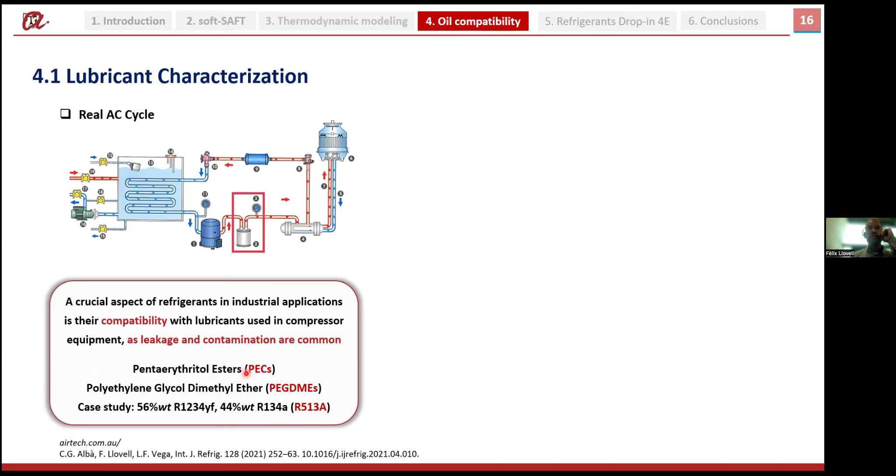The same is done for the family of polyethylene glycol dimethyl ethers. Using this information, we can develop a correlation to estimate these parameters. So this is an easy manner to have a description of these lubricants.

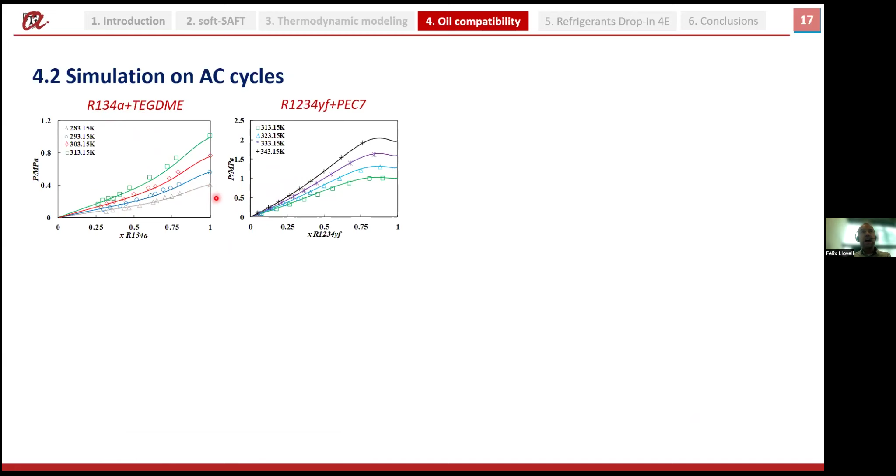Once this is done, we check the solubility of refrigerants in the lubricant, or the lubricants in the refrigerants. Using the soft-SAFT equation of state, we use available experimental data to describe our model and fit it. Once we have done that, we predict the behavior at different conditions in order to check what we are interested in: maximizing the solubility and avoiding immiscibility. For instance, it would not be good to have PEC 7 here, because here we can detect immiscibility.

Remember that a leak will have a very small amount of oil and a big amount of refrigerant, so we will be in that area.

In order to check this, we have calculated the Henry constants of the two refrigerants involved in the mixture, R513A, with a series of lubricants, and have looked for the lowest value that accounts for maximum solubility, avoids immiscibility, and also a qualitative criteria related to viscosity.

So finally, after doing this study, we found that PEC5 was the optimal choice, and once we have the optimal choice, we check the impact of this in case of a leak.

Here we are doing a comparative study where we are checking the COP, the coefficient of performance, and here we are putting 3 scenarios. The first is done with PEC5, compared with 3-ethylene glycol dimethyl ether. In this comparative study, we check the possibility of having 1% mass of oil, which means we have a leak, but still the system should work.

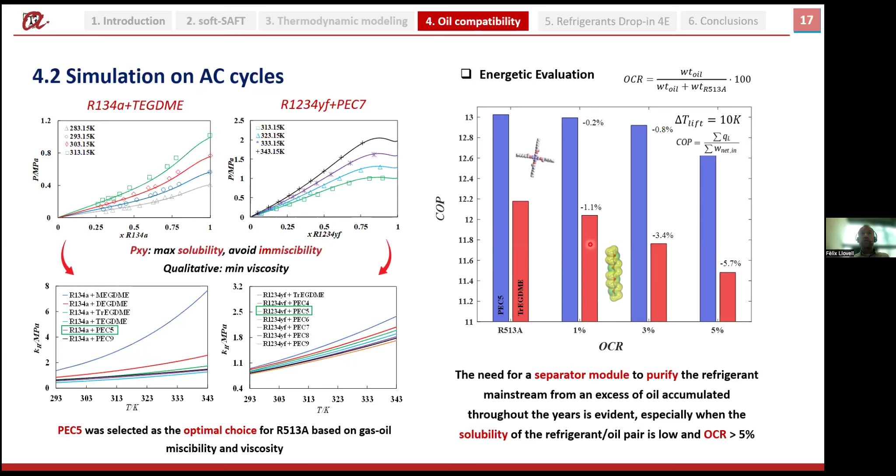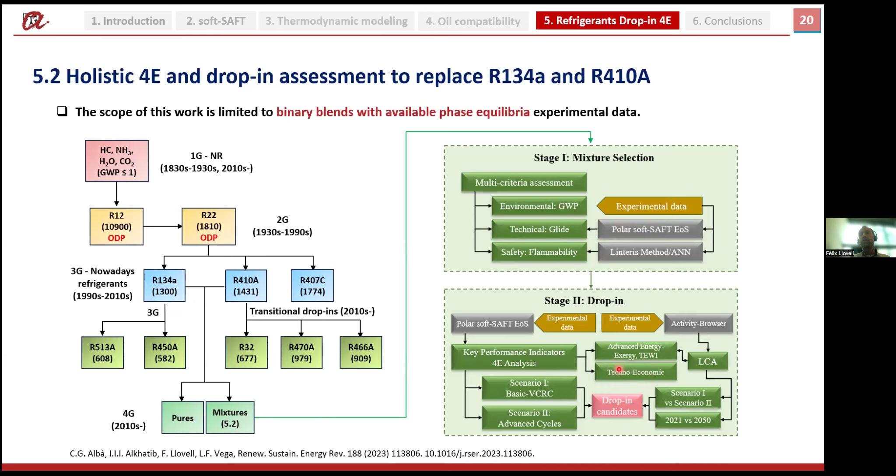To do that, we are going to check several criteria, most of them based on thermodynamics, in order to find a proper solution. There is a second stage, including LCA analysis and advanced cycles, that will not be explained in this presentation.

So basically, the first thing that we do is a bunch of studies concerning more than a total of 342 binary systems, split in combinations with the refrigerants seen previously, in ranges of composition of 0.1.

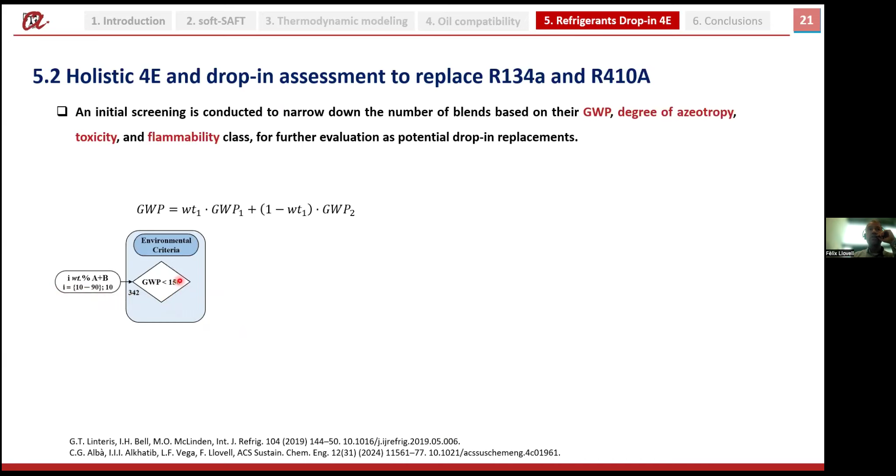We check which ones have a global warming potential below 150. From this, only 75 meet this criteria.

The second technical criteria is the glide temperature. The glide temperature is the difference between the bubble and dew points, and it must be as low as possible for the mixture to behave as a single refrigerant, as a pure fluid.

These calculations can be done at different conditions of pressure and temperature, according to the conditions of the evaporator and condenser, and imposing a criteria of 0.1, only 12 mixtures reach this condition.

So the next step is the safety criteria, which involves the calculation of flammability. In this case, this is not done using any thermodynamic equation, but using the Linteris equation, which takes into account the adiabatic flame temperature and the amount of fluorine atoms present in the system.

This establishes a normalized flammability index. We accept any of the mixtures classified as A1 or A2L according to ASHRAE, and we end up with a total of 8 possible candidates.

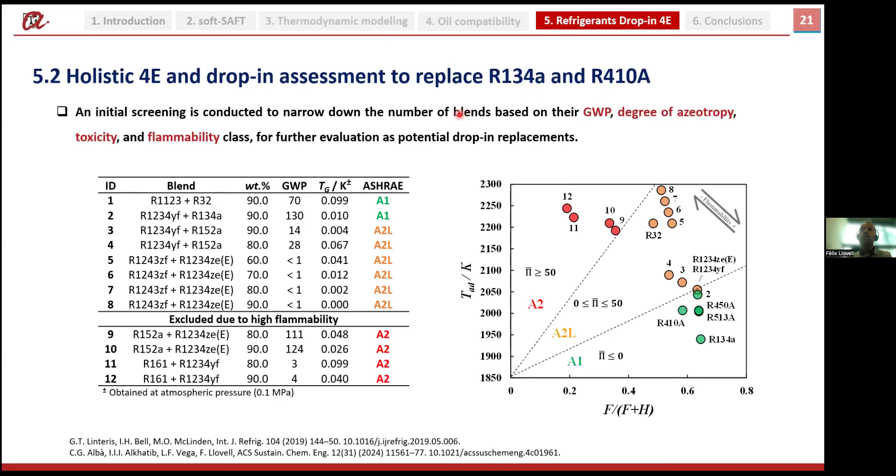These candidates are expected to substitute R134A and R410A, which are the 2 most common commercial refrigerants used nowadays.

The next step involves the thermodynamic analysis, done first by analyzing 3 key performance indicators: the volumetric cooling capacity, the discharge line temperature, and the condenser pressure.

Particularly, the volumetric cooling capacity is very important, because if we need to substitute R134A and 410A, we need a similar volumetric cooling capacity.

So what we do is study the volumetric cooling capacity using the thermodynamic information, and check which mixtures are similar to R134A and 410A.

What we can see for 134A is that mixtures number 2, 3, 4, and also 5, 6, 7, and 8 have a very similar volumetric cooling capacity.

Mixture 1 is out of the scope. For the case of 410A, 1 is the closest one, although it is clear that there is not a simple and easy solution.

This study is done for all drop-in key performance parameters, and finally we end up with 4 that have good compatibility, which are mixtures 2, 3, 4, and 5. Mixtures 6, 7, and 8 are good, but a little less good, and blend 1 is not good to substitute R134A because it has low compatibility.

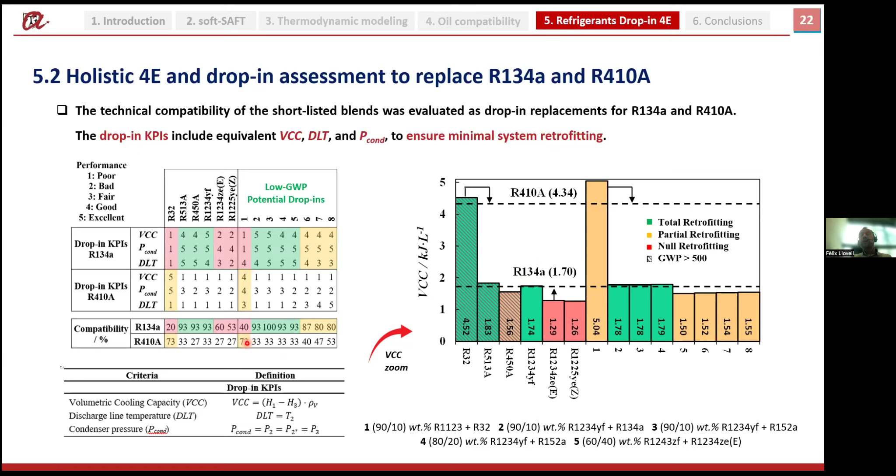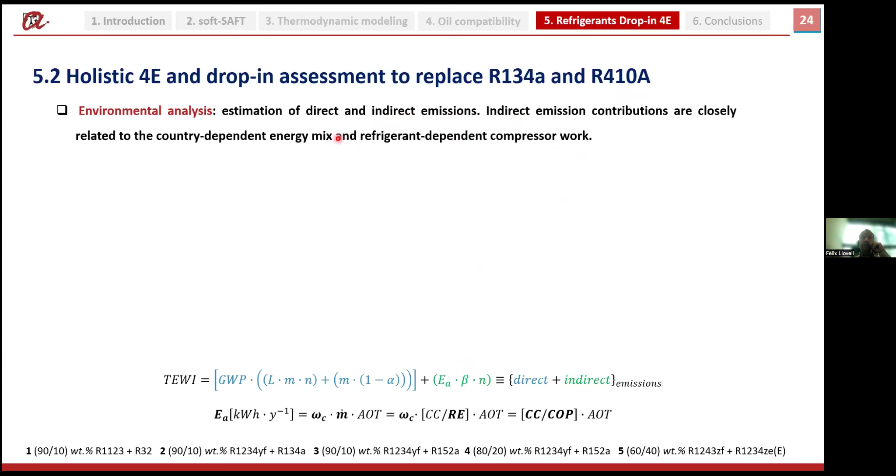To complete the study, an environmental analysis is done considering direct and indirect emissions. Indirect emissions are very important because they are related to the country-dependent energy mix. So basically, once we know that our blends have a lower global warming potential, we also need to check what is the impact of their use in the compressor and how this electricity is produced.

So basically, the conclusion we reach here is that indirect emissions may be more important than direct emissions. So it is also very important to consider how the energy sources are obtained, because they have a strong impact regardless of the refrigerant fluid that is used.

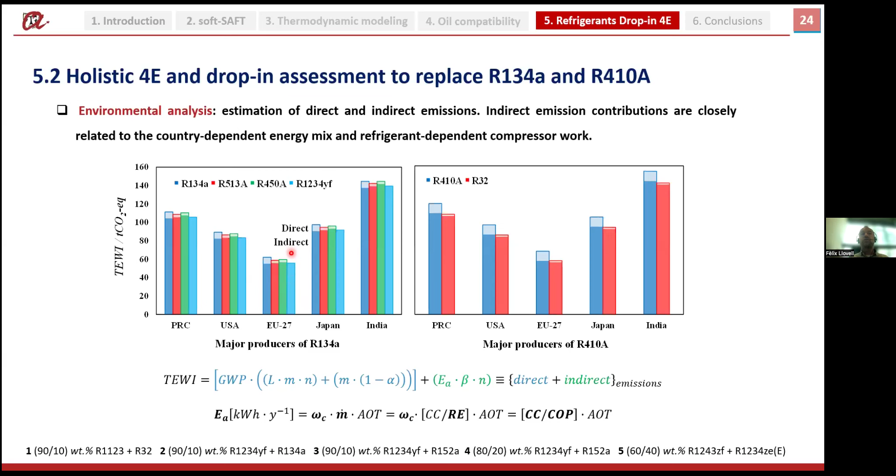Just to conclude, I would like to say that I was expecting to enhance the role of thermodynamics in order to identify these effective fourth generation drop-in refrigerants. I just put a couple of examples using different KPIs and how, based on this thermodynamic information, we can take important decisions that can be used in the refrigeration industry in many different fields.

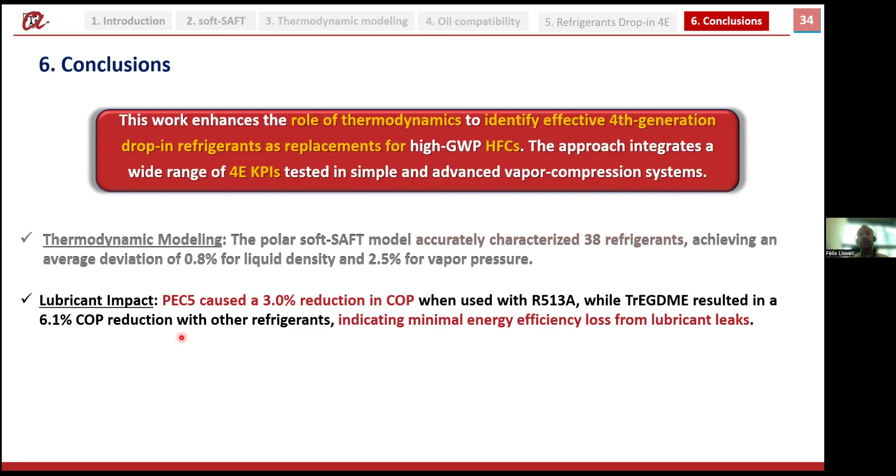As I said, it is also important to check the lubricant impact, and this can also be done using thermodynamics. This work can also be extended, of course, to advanced cooling cycles and implementing other tools such as machine learning techniques that can be useful to study other parameters that cannot be analyzed using an equation of state.